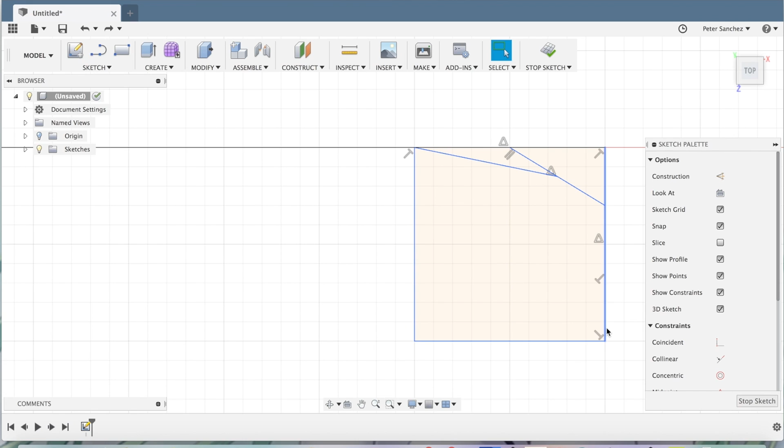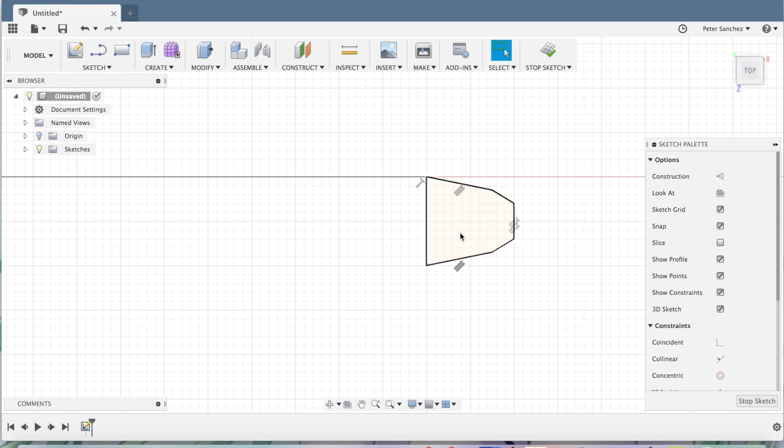What we want to do is get rid of the square and have this selected part be the whole tooth of the gear. So good, here we have the tooth of the gear. You could play around with the size of the tooth - I don't really know if this is a really good shape. What I'm just going to show you is how to make it look like a gear, basically.

So you can see this line, the internal radius - we don't really need this anymore, so we could go ahead and delete that. But we do want to make sure we still have the center point. So what we are going to do is...

Use a circular pattern. You can see right here it says it duplicates selected sketch curve in an arc or circular pattern, very useful for what we're doing. In Fusion 360 it says objects, and we have to select the object - this is the object right here. So select that, and it's selected, and we need to select the center point. Remember the center point, this is the center point.

So you can see right now, if we zoom out, it has 3 teeth. If we made this like this, we would have a 3-tooth gear. Well, that's kind of stupid - we wouldn't have a 3-tooth gear, especially with this radius. So we need more teeth. We're just going to up the quantity.

And we want to keep doing this. There really is no set point for how many teeth you want, but basically what you want is the space in between the teeth should be roughly the same as from here to here - the radius of the gear, and the distance between these 2 points should be the same distance between these 2 points. You can see with 13 teeth, that's not really the case.

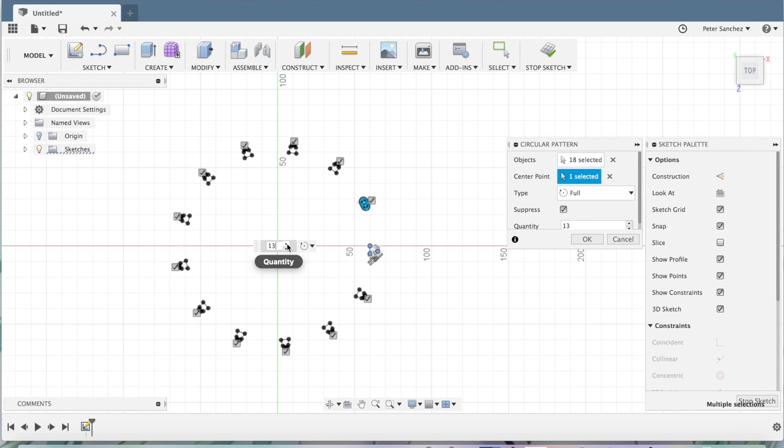Obviously, you could calculate this in reverse if you wanted a specific gear ratio, not a specific radius.

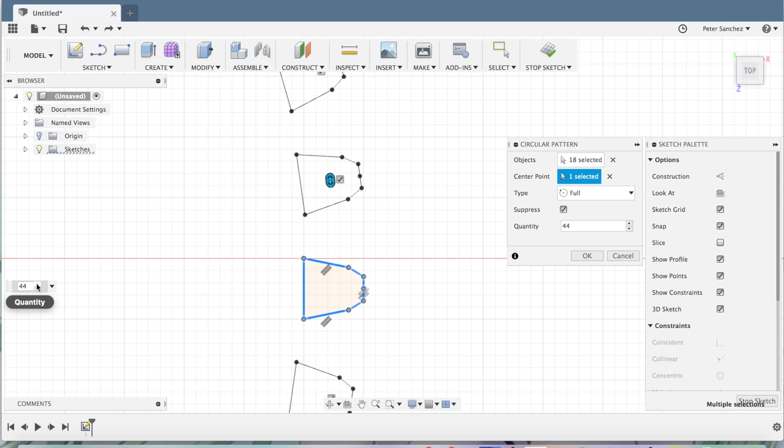So we're just going to keep increasing this until the points come close to each other, then we can actually measure them. 43, 44, 45, 46... maybe 44... 45, 44. So let's try 44. So it's a 44 tooth gear now.

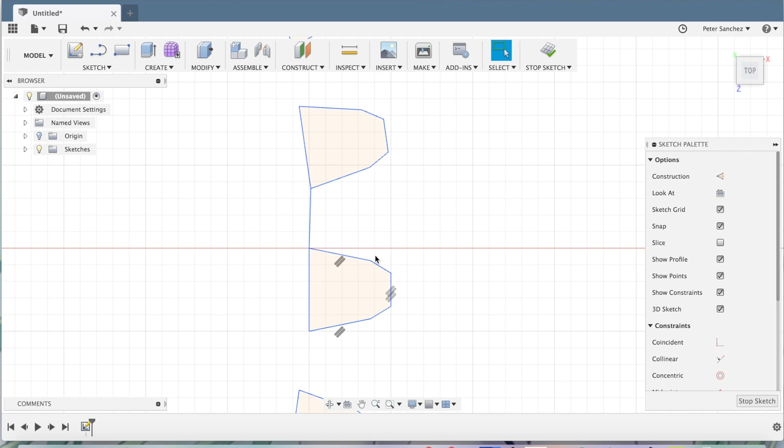Let's try this - let's try 3.591 millimeters. So let's see these points... 5.616. So I'm not really doing any math or anything, I'm just kind of looking at it, which is kind of what you can do.

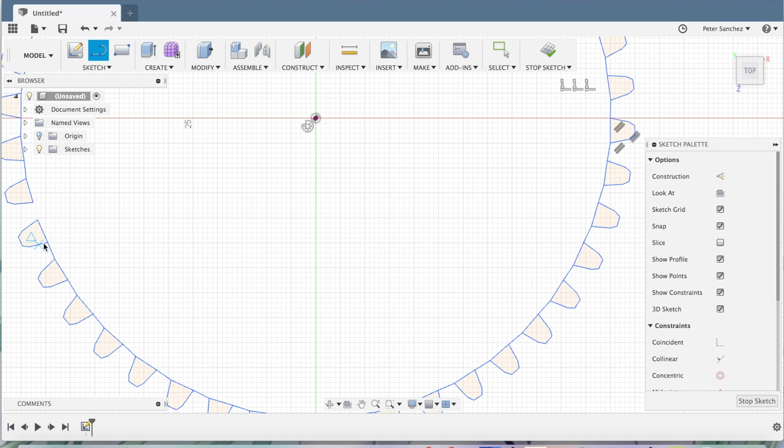With numbers of teeth, if it's a big gear and you increase it just by 1 or 2 teeth, or decrease it just by 1 or 2 teeth, that probably won't affect it from working - it just might be a little loose or a little tight. You can see the final one right here.

So we have everything selected and we want to extrude it. What we do is we could just pull up on this - if it's 10 millimeters right now, let's make it 15 millimeters. That looks good, I guess.

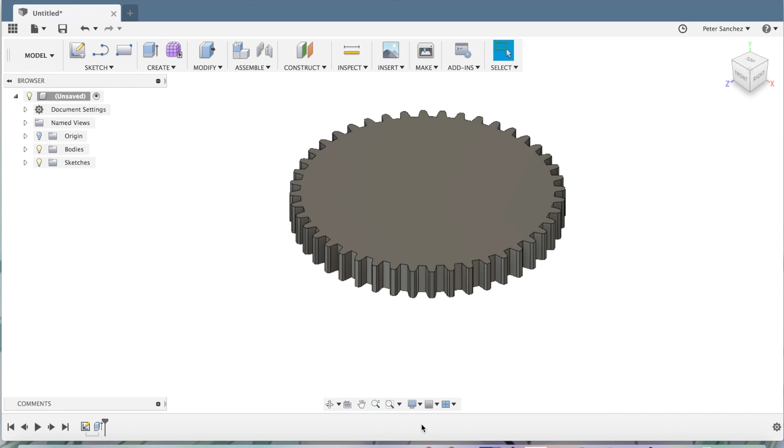So we have right now our 15 millimeter gear, and this is just how to make the gear with the teeth. If you want, we could put a hole in the center, but your hole will vary because you might want a hole for a specific motor or something you're going to put in the middle of the gear.

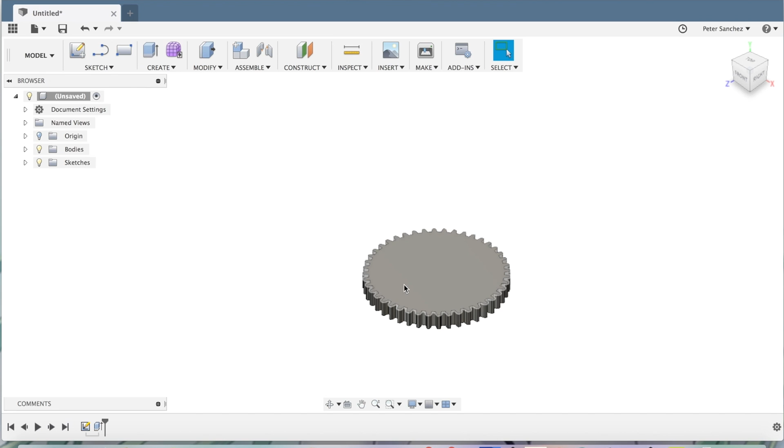So this is how to make a gear in Autodesk Fusion 360. It's actually pretty easy - you should try for yourself.